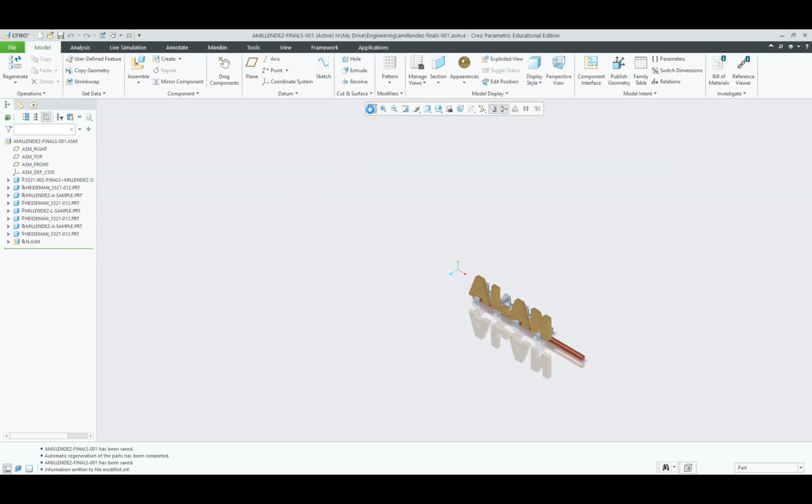This is what we are going to do for our finals. We are going to assemble our name in Creo, and we will create each of these letters as a part, and we will assemble them using the assembly feature in Creo.

So for our finals, you will have to do your name or your nickname, and you're going to need to do three unique letters. So if your name is Alan, you will have to do letter A, letter L, and letter N. If your name is Bert, you have to do letter B, letter E, letter R. Okay? You can do the fourth letter or fifth letter if you have more time, but the minimum would be three unique letters.

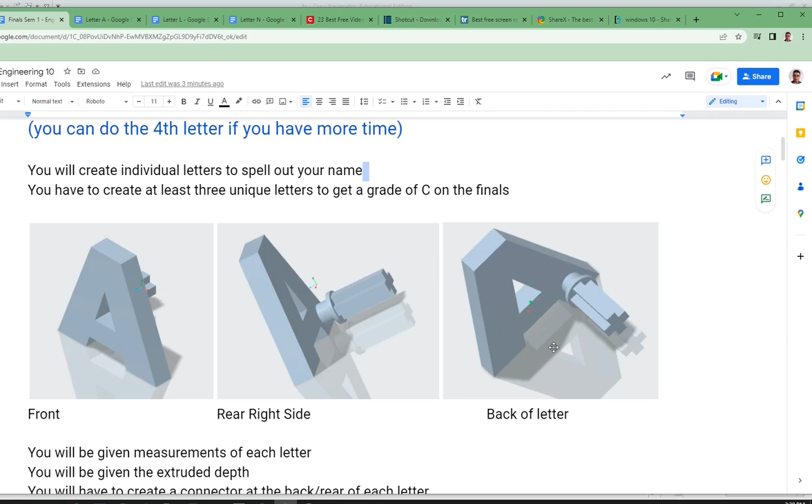So when you do your letters, you will have to do them in 3D, and you have to put a connector at the rear right side. So rear meaning back, on the right side, you must have this. So here's the back of the letter. If you look at the back of the letter, this is the right side, and that's where you're going to put the connector.

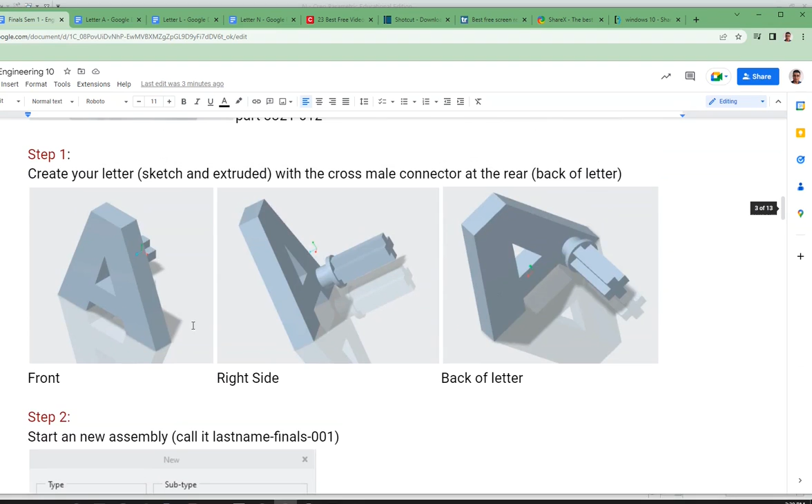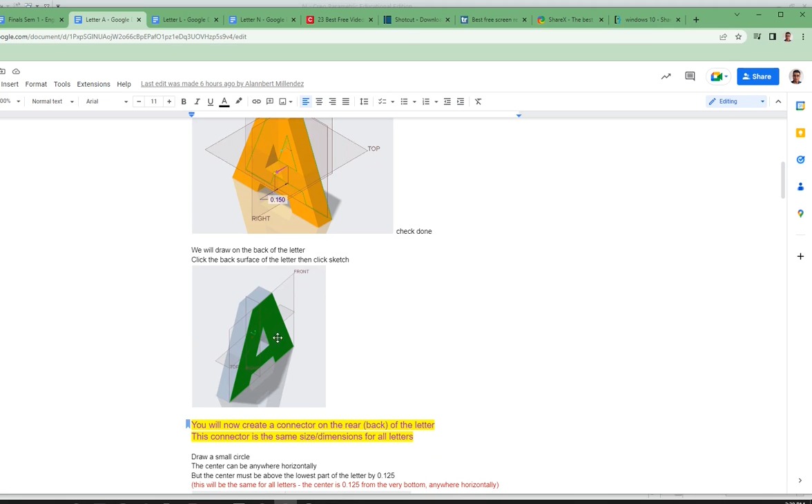Okay. So for your letter A, I gave you all the dimensions that you need to construct letter A. You will have to extrude that to 0.150. And then when you're done, you're going to use the rear side. So this is the back side of that letter. And on that back side, you're going to create a sketch, and then you're going to create a circle with a diameter, not a radius, but a diameter of 0.15. The center of that circle is 0.125 from the very bottom of the letter.

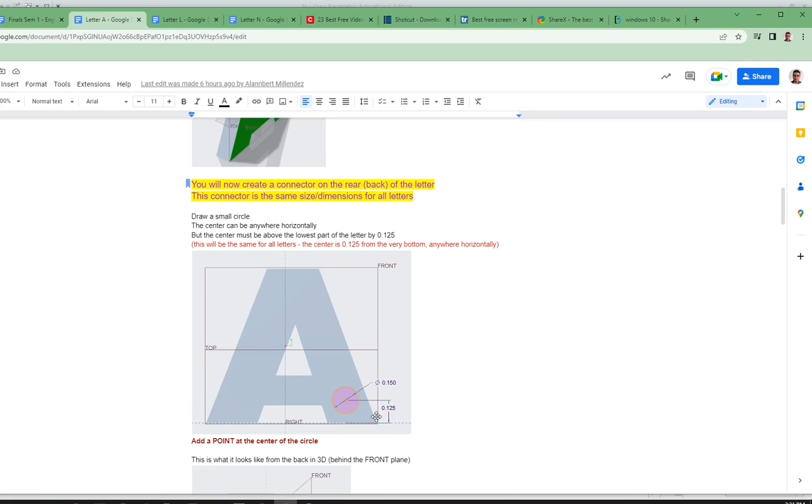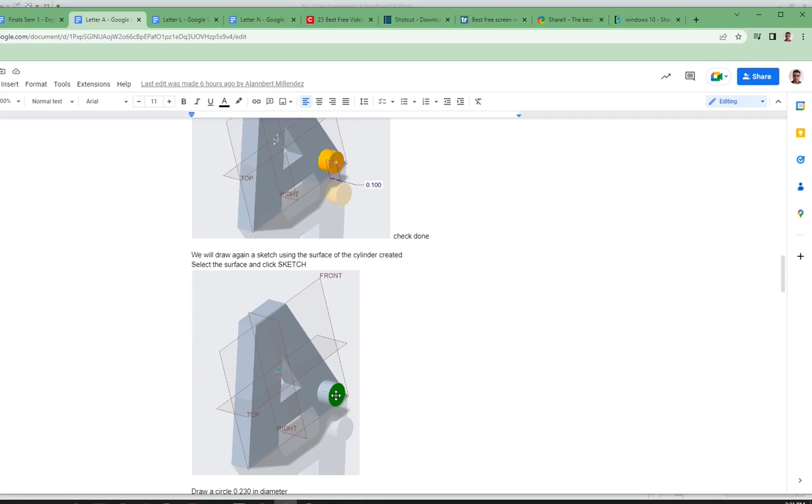At this point, you will also put a point at the center of this circle. And then once you have that circle and that point, you will extrude that to 0.10. Okay. And then you will select that face after the extrusion. You're going to select that face so that you can do another sketch, and you're going to draw another circle that's bigger. The diameter, not the radius, but the diameter is 0.230. So it's bigger than your first circle, and you should be using the same center as your first circle.

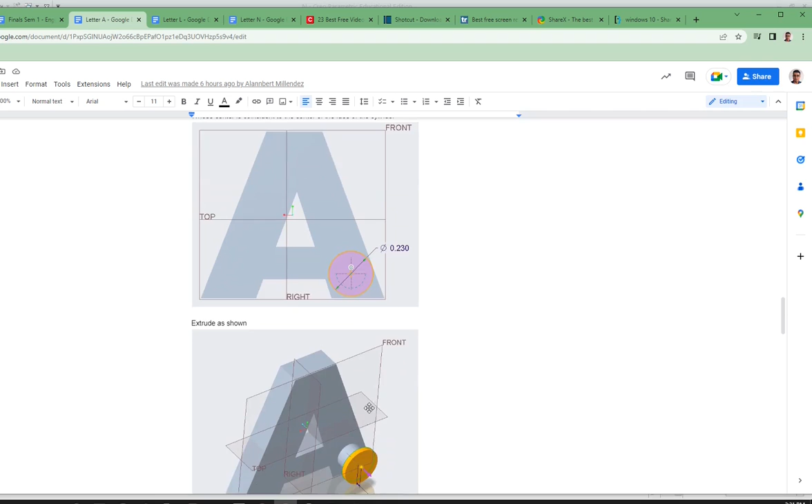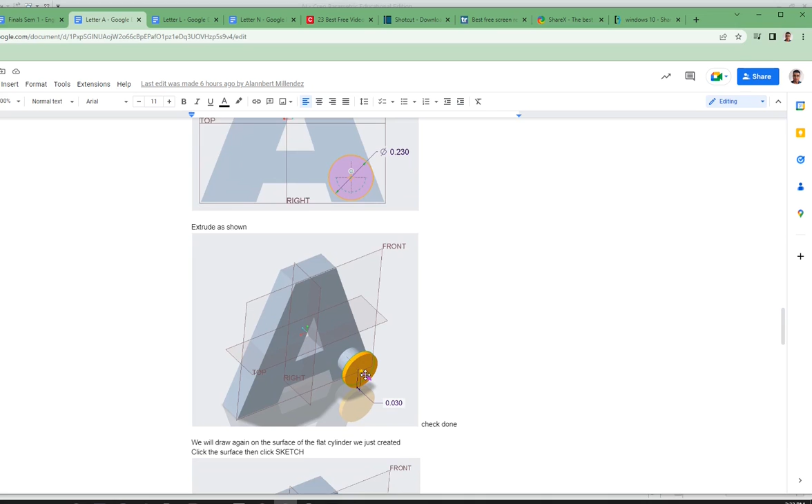Okay, so now you're going to have that second circle that's bigger, but you're only going to extrude that to 0.03. So the first smaller circle is longer, and then this one is shorter, so it's a flat cylinder. And then after you've done your extrusion, you're going to now select this new face, and then you are going to insert your cross. So the cross section that we did back when we did all our parts, you will do that again. If you don't have that, then you have to draw this cross.

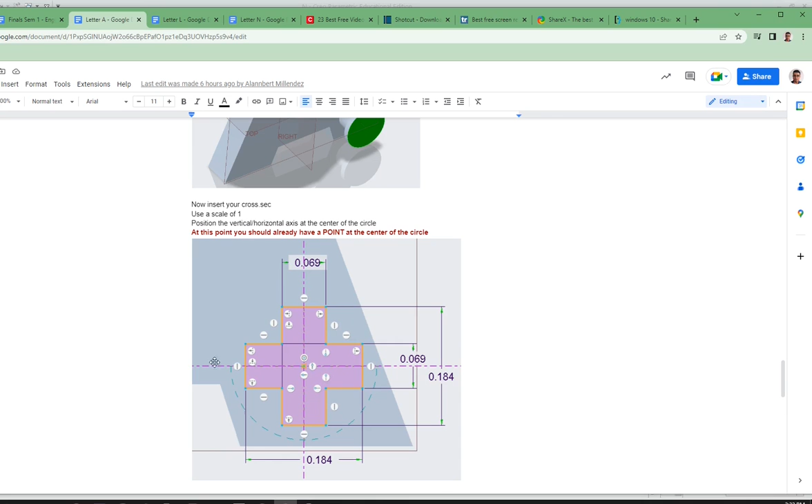Here are the dimensions. Make sure that the axis of the cross, the center of the cross, is at the center of that last circle we did. And then you're going to extrude that to 0.40, and that's what you're going to have. And then you're going to check your volume to see if you got it correct. Okay, so if the volume is correct, then you did everything correct. And then you will now go to your next letter.

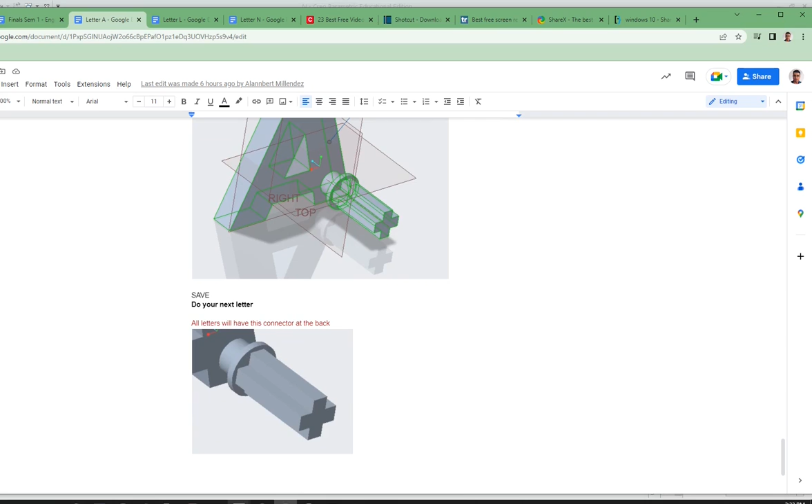Each letter will have to have this connector. Okay, so if your next letter is letter L, then you're going to have letter L also with a connector on the rear right side. Okay, there you go. If your next letter is N, then again you have your letter N, and then you will have your cross connector.

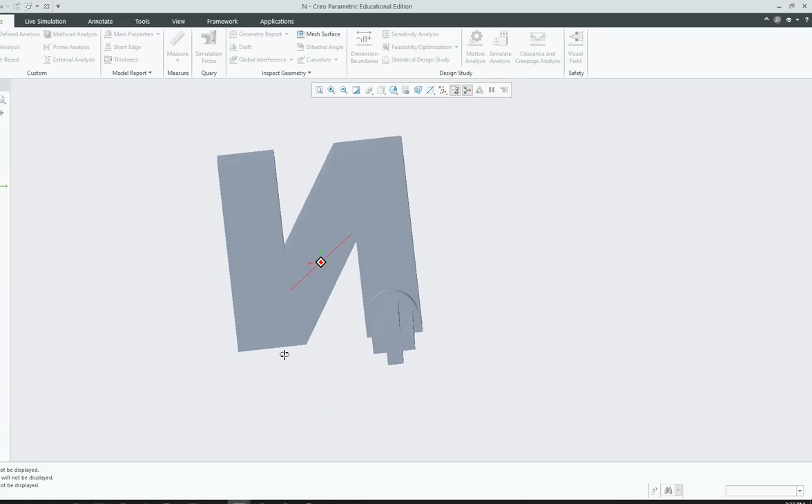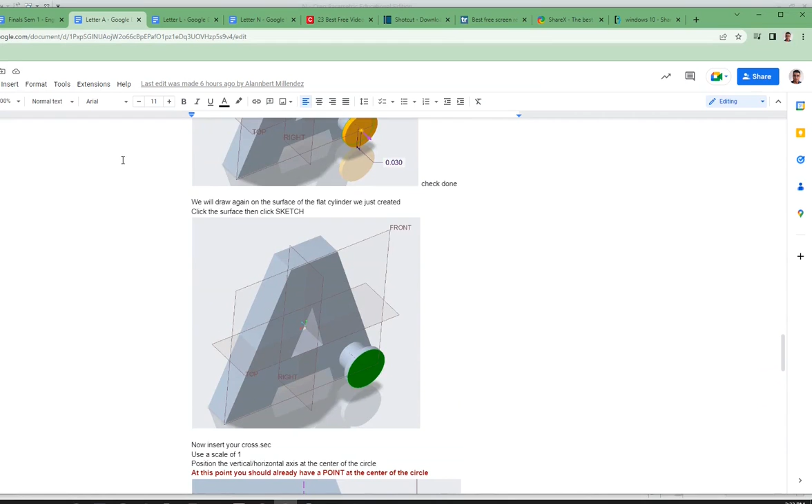Okay, so that's the first step. You're going to draw or create a 3D of each of the letters. Minimum is 3, and that's gonna give you your passing grade. And then we're going to assemble them after we're done. Okay, so I have given you the dimensions for your letter A. If your next letter is L, you also have the dimensions for letter L. You're gonna extrude that again.

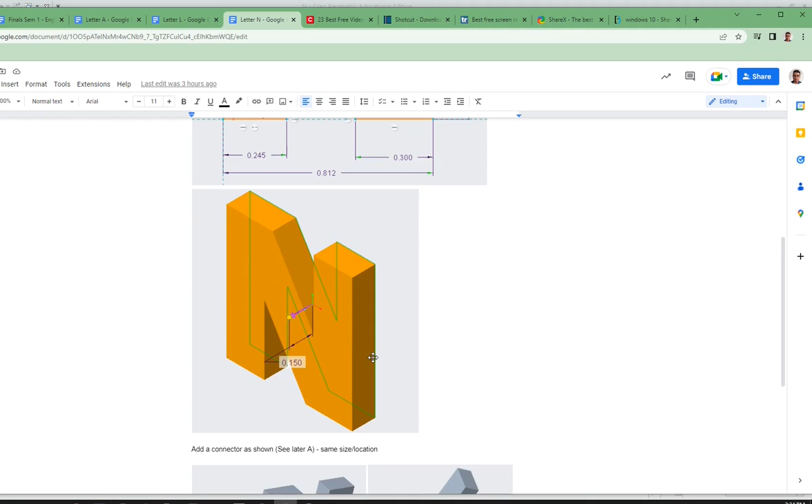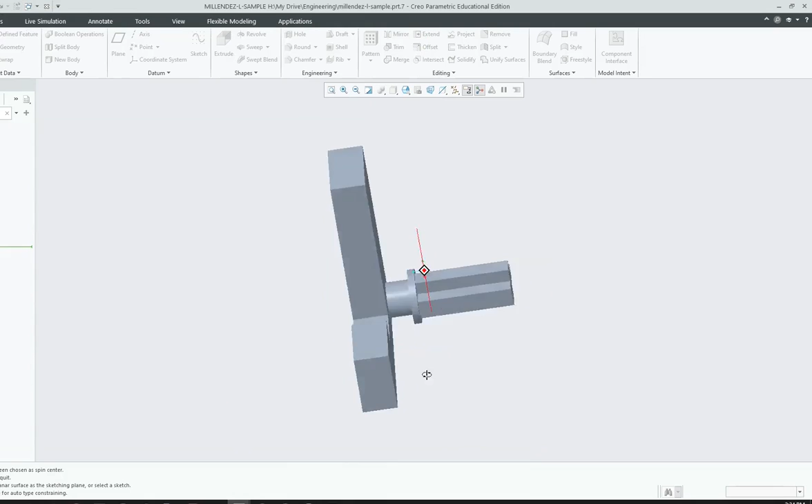And letter N, I'm gonna give you the direct dimensions for all the letters, the minimum dimensions. You can create them, and then you should always put a connector on the back rear right side of each letter. Same dimensions as you've done for letter A, exactly the same. So all of the letters will have a connector - that's for letter A, letter L, and letter N, minimum of three.

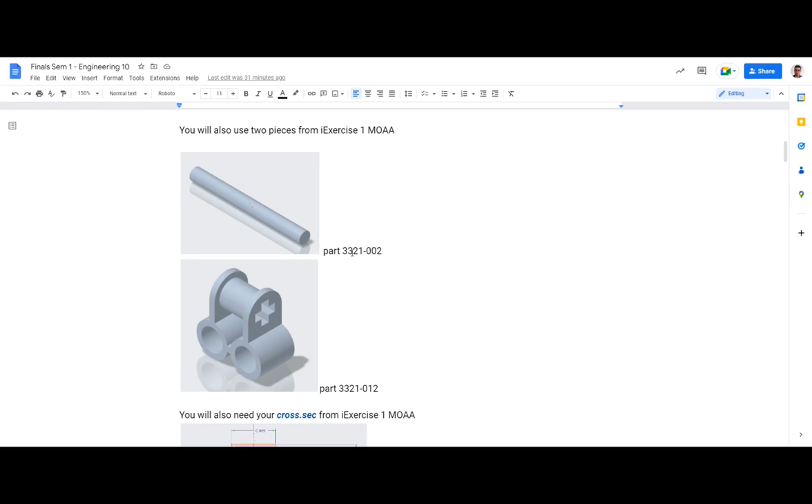The next thing you're going to do is assemble them using your two parts from the MOAA, or exercise number one. Just to follow up on that, we are going to use parts from our exercise one from the MOAA, part 3321-002 and part 3321-012. We will also use cross dot sec, which is one of the first sections we did from one of the very first parts in exercise one.

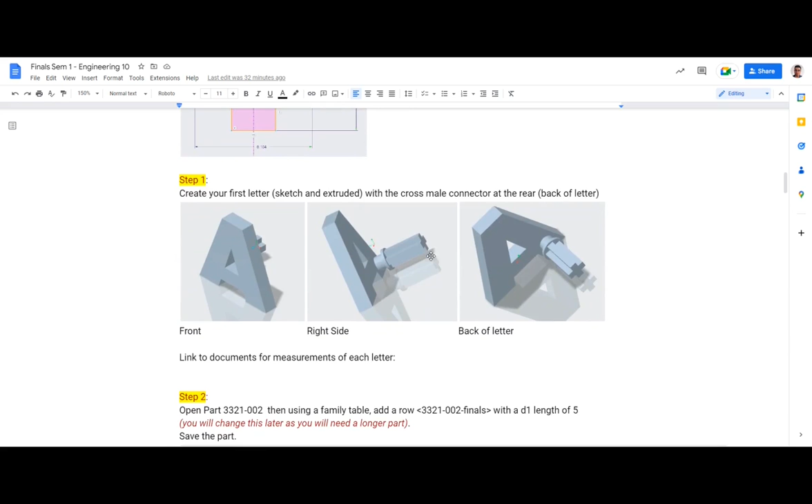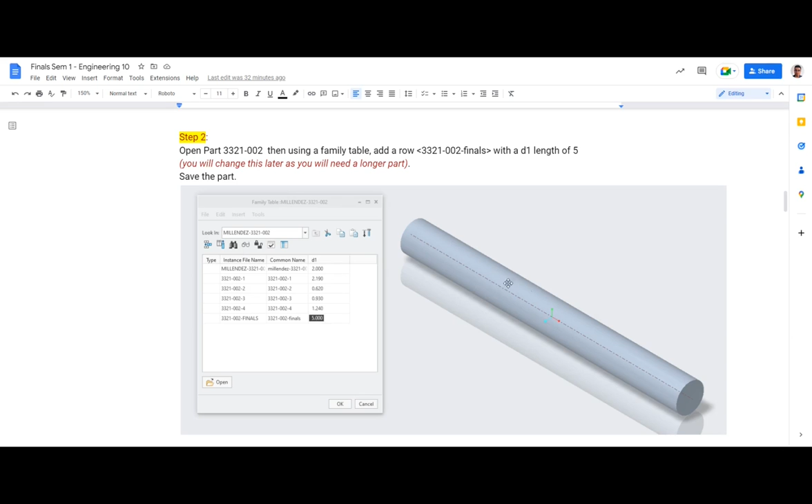So again, you're going to create your letters, put a connector, and then open up part 002, and create a new row using family tables. Assign that row a distance of 5, and you will go back to this one because 5 may not be enough for your name. So you're going to create a new assembly, make sure it says assembly, and name it using your last name dash finals dash 001.

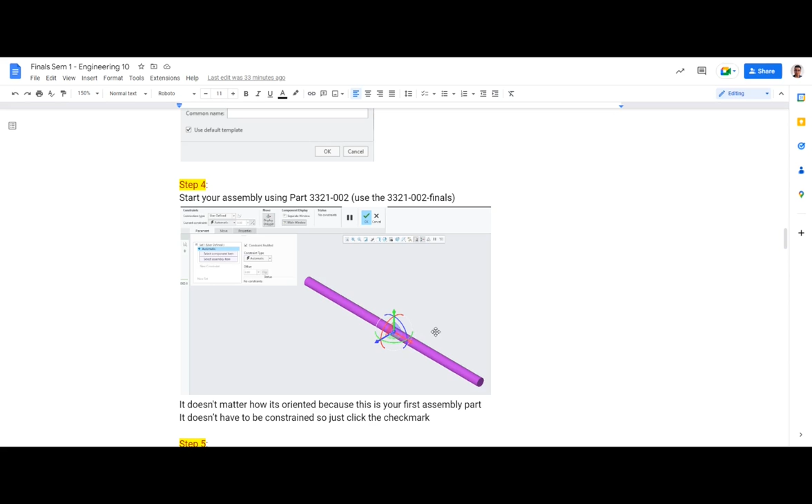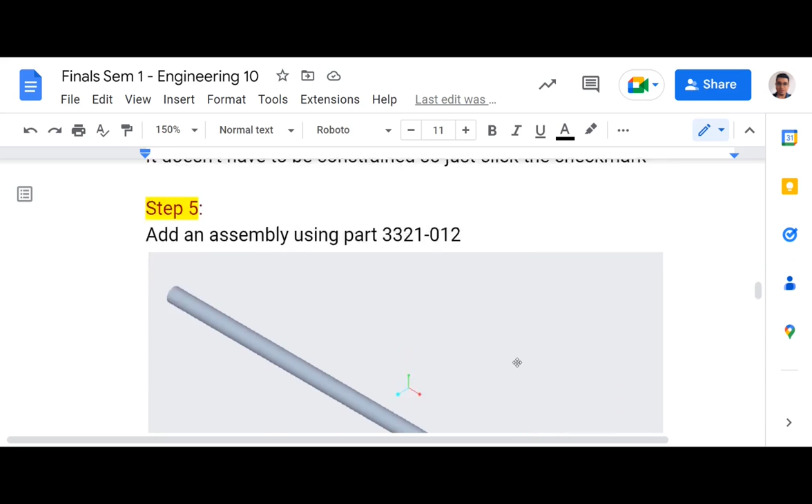The first part you're going to add is part 002, using that new family table row that we created. It doesn't matter where you orient that, because that's our first part. So all you do is click the check mark, and then add a new assembly - you're going to add your 012. So 012 would be your connector from what we did on the MOA, or the assembly - that's 012. After that, you will align that to the left end of the 002 part, the rod.

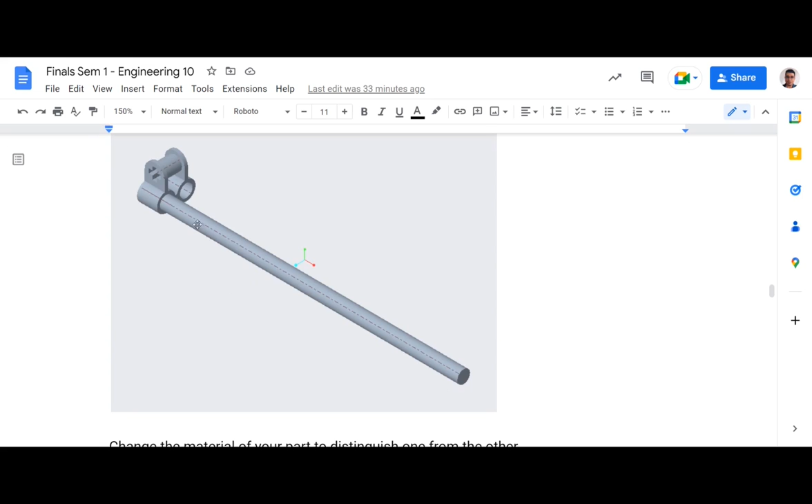And then you can actually change the color of this material by going through the appearance and then selecting a color from this list. Okay, let me show you how.

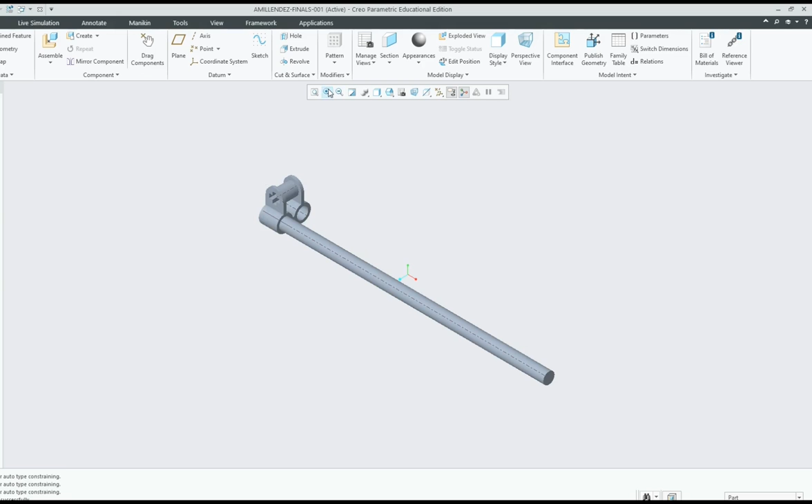Now you can see that the parts are aligned. So if you zoom closer to this area and turn that around, you can see that part 02 and part 12 are aligned.

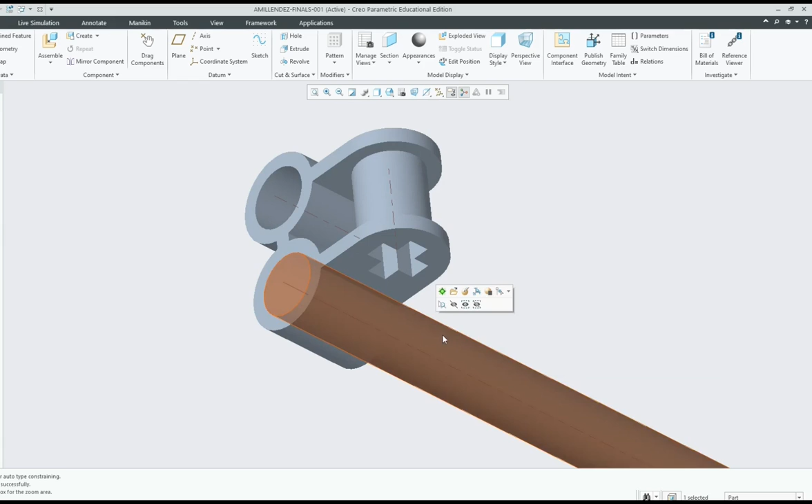Also, you can change the appearance of the parts by putting colors on them. To do that, you change your selection to part, select, let's say, the rod or part 002, and then over here up on the ribbon, there's appearance, and you can select your own colors here.

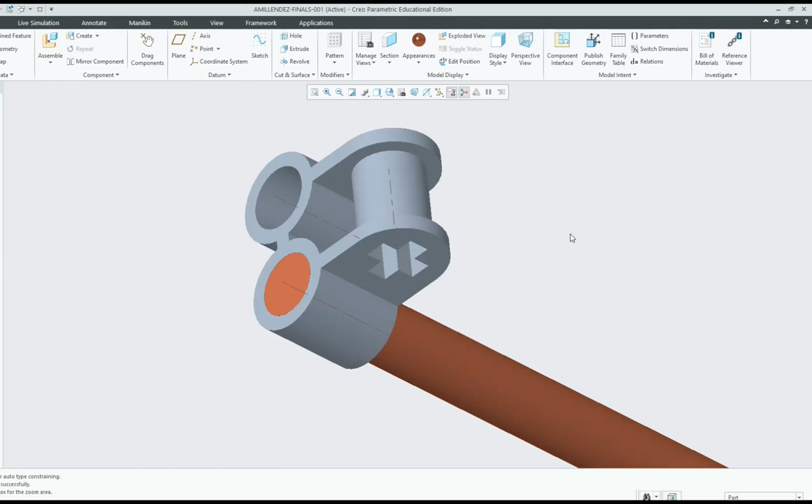For example, let's select this one, and then it would now change color. You can see the difference, that they're aligned - it's flush in the face and everything. You can also change your view from standard shading to shading with reflections, and it should just give you a more realistic effect of your part.

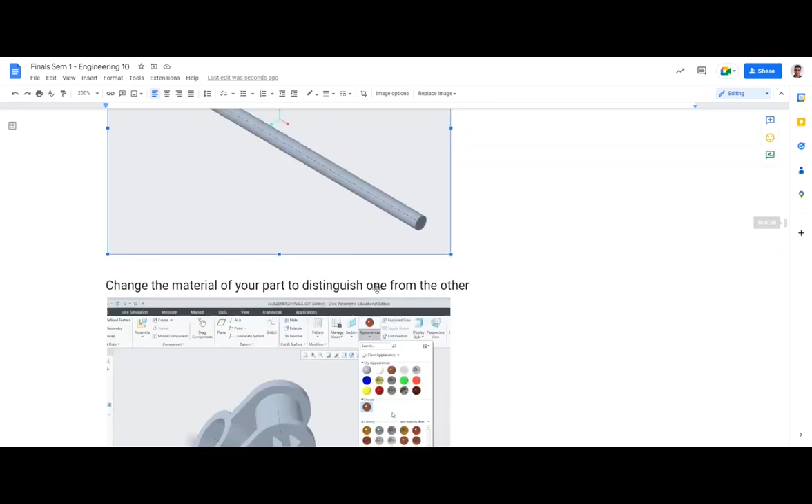Once you have changed the appearance, go ahead and click save, and you're now ready to go to the next step, which is adding your first letter. In my case, this was the letter A, and remember that letter A and all letters have a correct volume depending on the letter, and it has these connectors found on the right rear of each letter.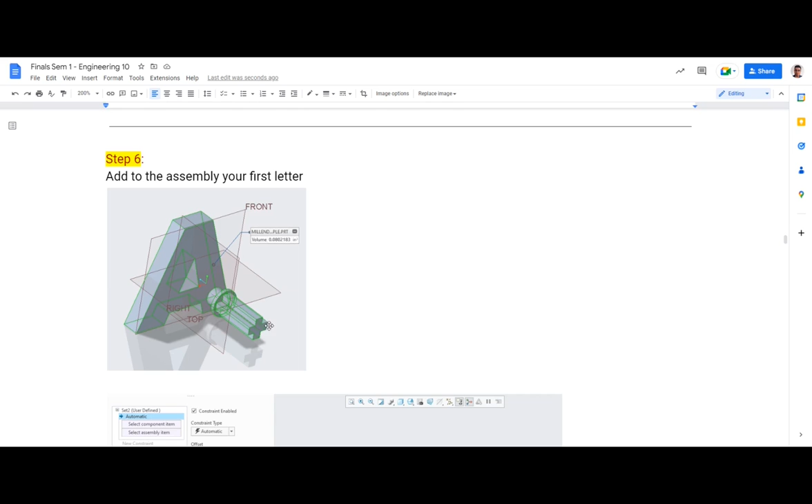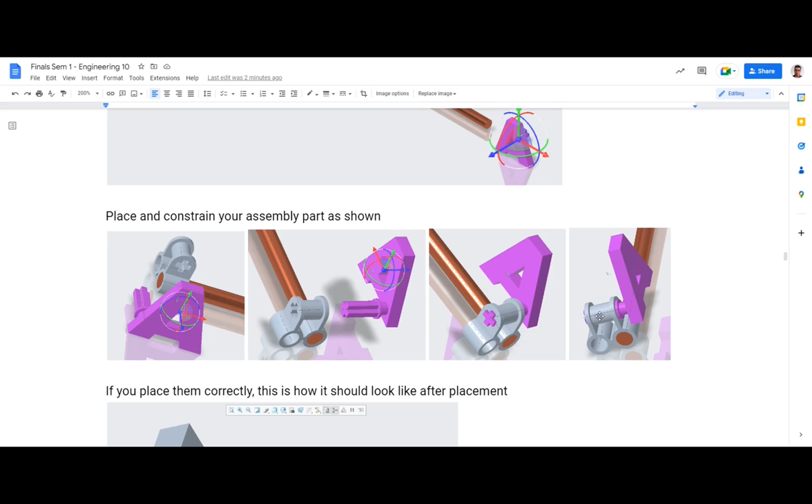When you place it in Creo, you have to place it and put constraints so that the connector will align to the cross hole of part 321.012. This is actually the essence of the finals, is to do your assembly - connect it and then make sure that it inserts correctly. There will be an extra piece sticking out, and the 321.012 gray piece and the letter should be flushed on this surface.

And when you place them correctly, when you check the green check mark, this is how it should look like. You can change the appearance again, just like I showed you before. And the last thing you should be doing is checking for a global interference check.

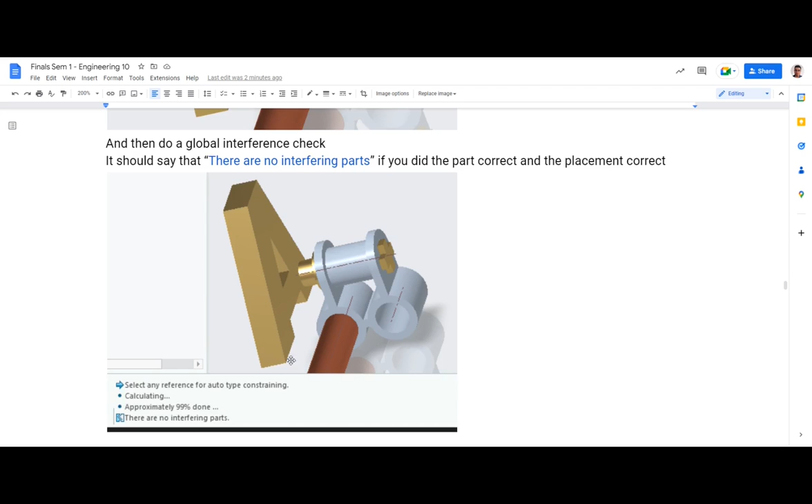It should say in the lower left corner that there are no global interference or interfering parts. Once you confirm that, you can click save, and this is how it should look.

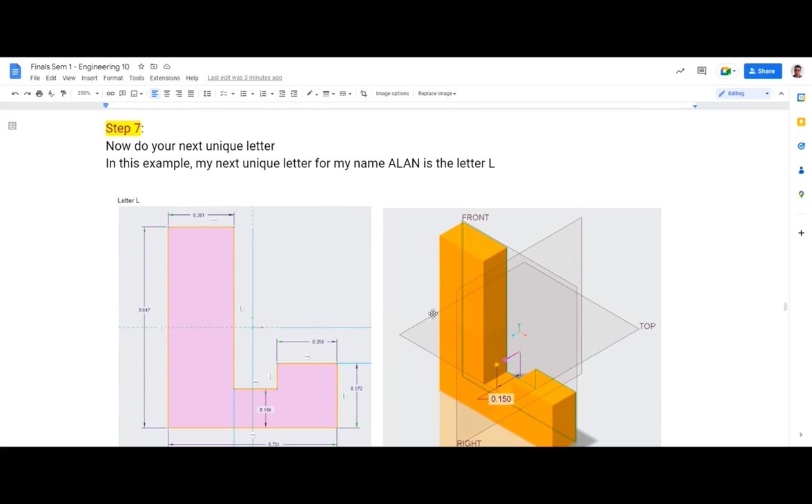The next step is to create your next letter. In my case, it's letter L. I'll give you all the measurements for each letter. You'll extrude that letter again, and from the right rear of each letter you'll create the connector, just like you did for letter A.

Now, on this connector there's a circle, and the center of that circle is always going to be 0.125 from the very bottom of each letter. That's always the case.

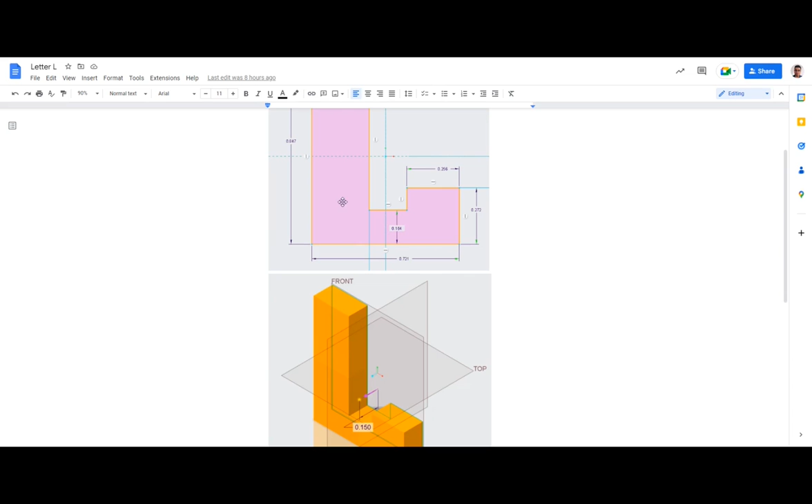It doesn't really matter where the circle is on the left and right, but the circle on the rear face—not the front face, the rear—should be 0.125 from the very bottom of each letter.

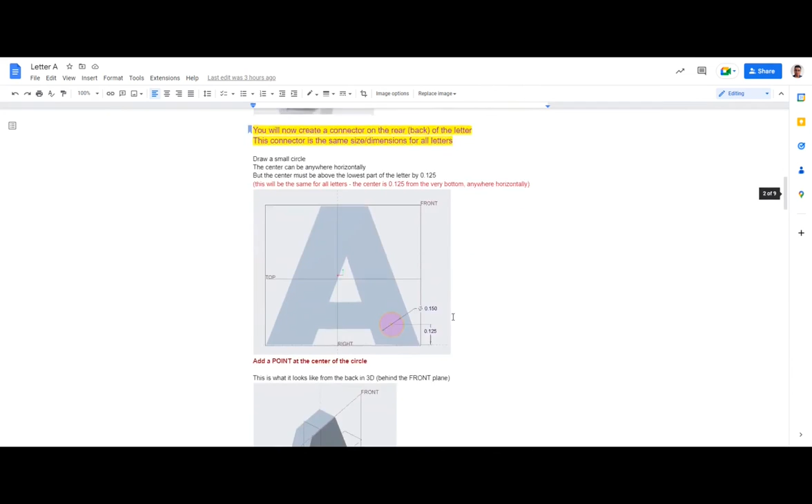I showed you how to do that on letter A. You have to draw a circle on the right rear side, then put a point. You can see the circle and the point are 0.125 from the very bottom of the letter, and then you'll extrude that again to 1.0.

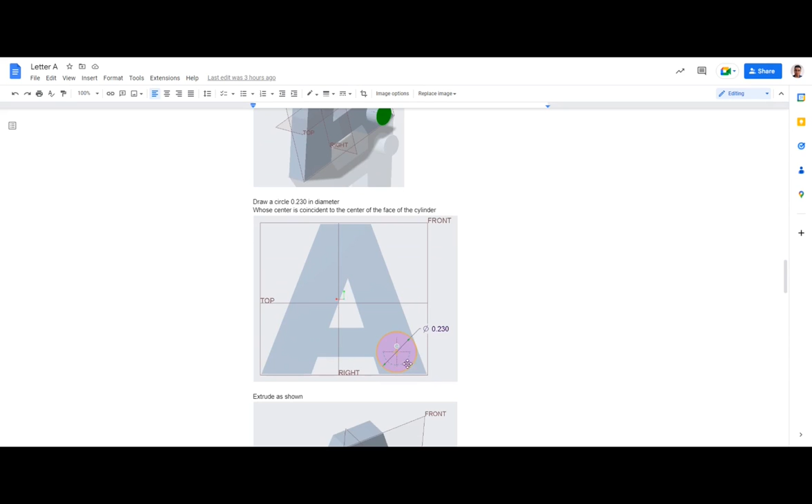Then you're going to create a new sketch using the surface of that extruded cylinder. You'll create a new circle with a diameter of 0.230—diameter, not radius—and they must be concentric, using the same center.

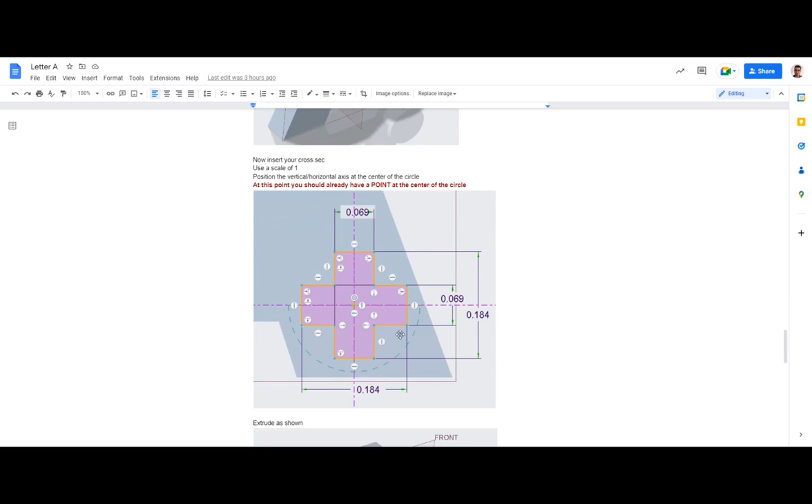Then you're going to extrude that to 0.03, and then create your last sketch using that surface. Import your cross section or draw it again if you don't have one, extrude that to 0.40, and when you click OK, you can check the volume.

That's how each letter should be, so now you're done with your letter L.

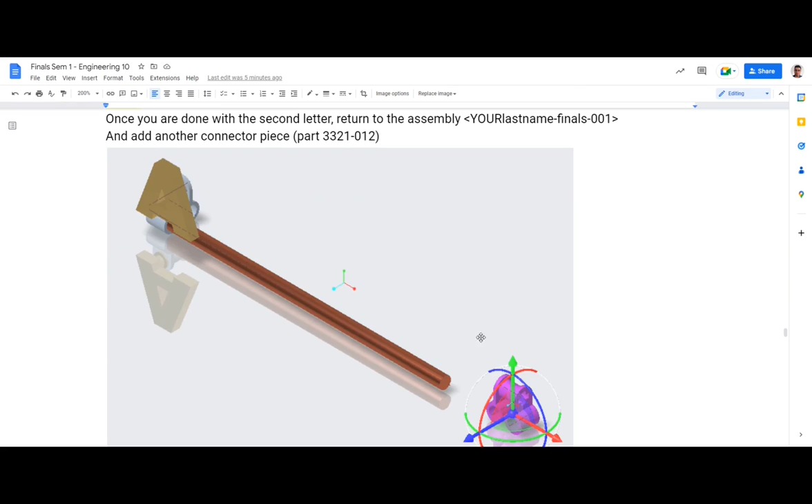When you're done, go back to the assembly and place not the letter first, but another part, 3321012, which is this connector, and do some placement and constraint. For now, you can just put it anywhere in the middle of this rod, which is 3321002. Once you have it there, the next step is to add your letter.

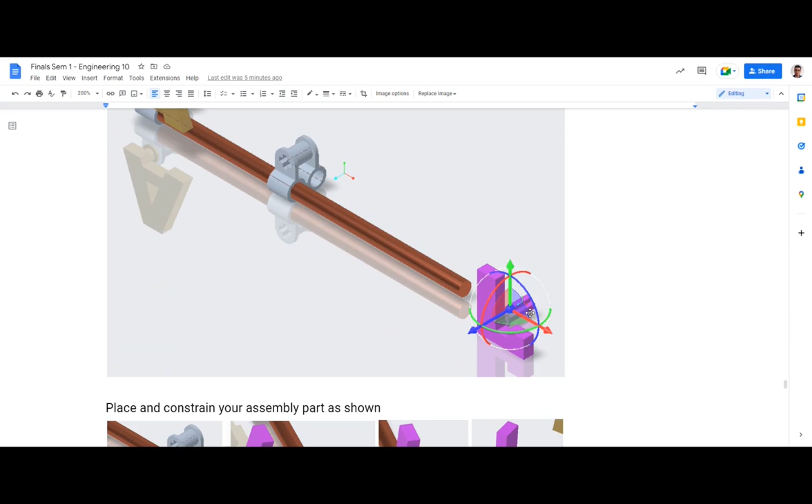Remember, there's a connector here, and then you'll put this letter and use the back connector to fit it into this hole. You can see here, you can move it, and do some constraints so they're aligned, then have it flush on the surface with something sticking out in the very back end.

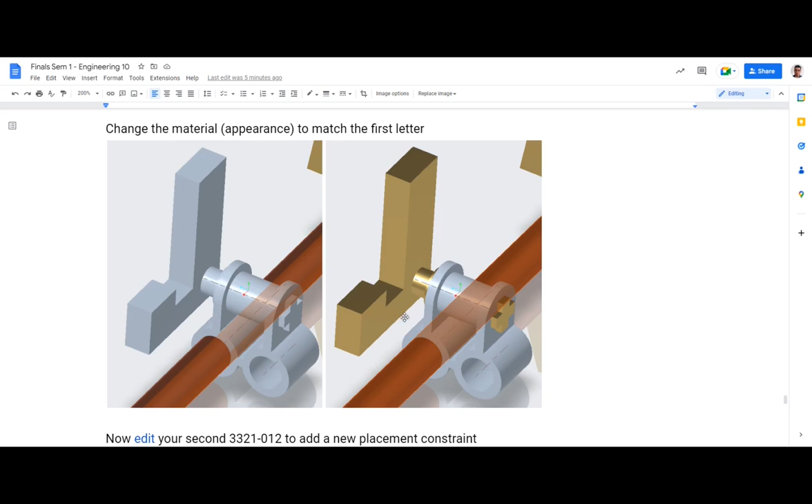When you're done, you can change the appearance again, just like we did for letter A. Now, because we placed this connector in the middle of part 002—this brown rod that I have here—

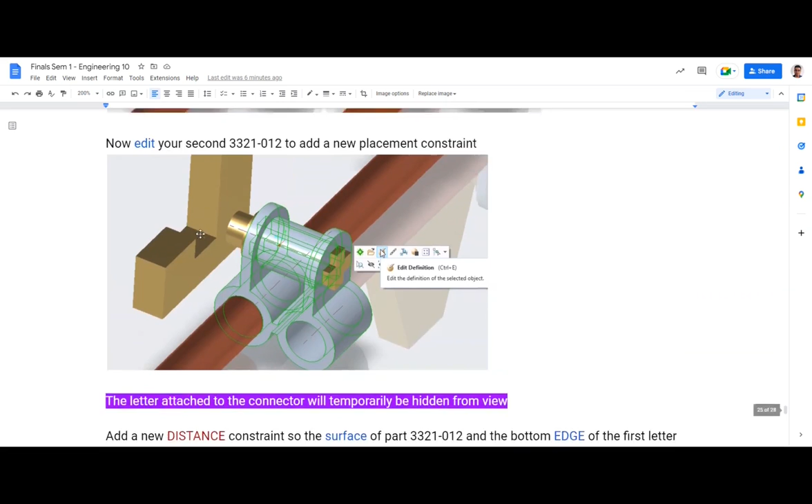you'll have to edit the definition of 012, and this letter L, or your second letter, will disappear temporarily. As you put in a new constraint, you want to use the inner surface of 012 and the edge of the first letter, in my case letter A, so that they have an exact distance of 2.0.

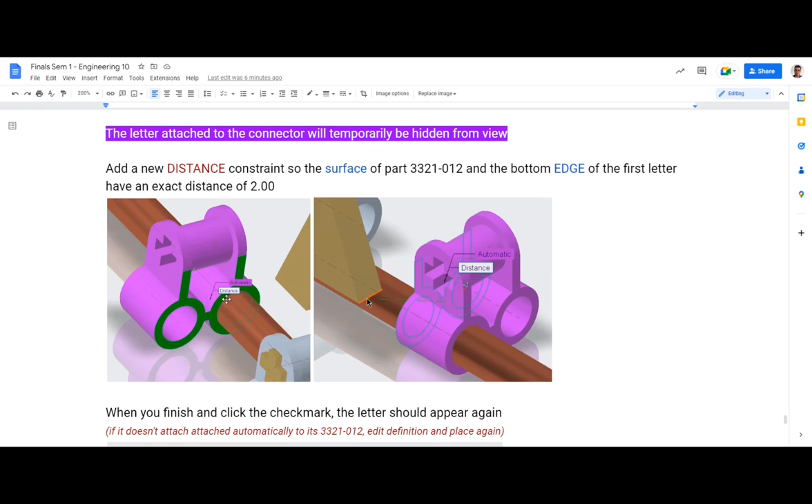You want the distance between this surface and that one to be 2.0. Let me highlight that—you want that to be 2.0. Once you have that, when you click the check mark, the letter should come back and attach to this connector. If it doesn't, you can just edit the placement again.

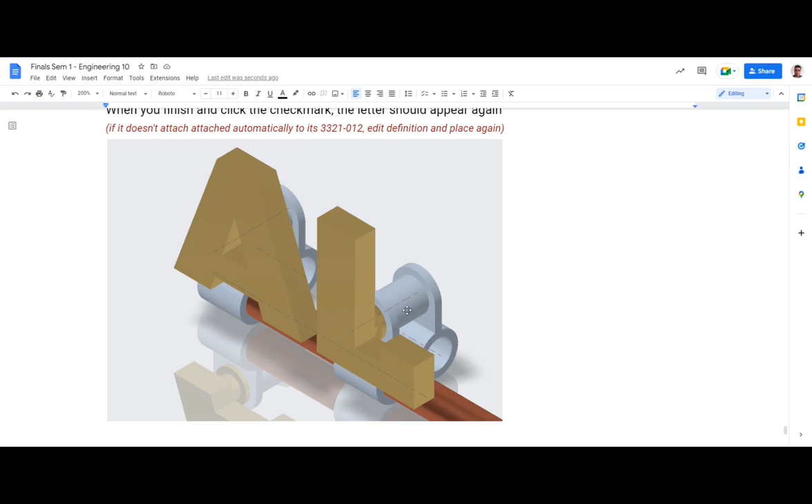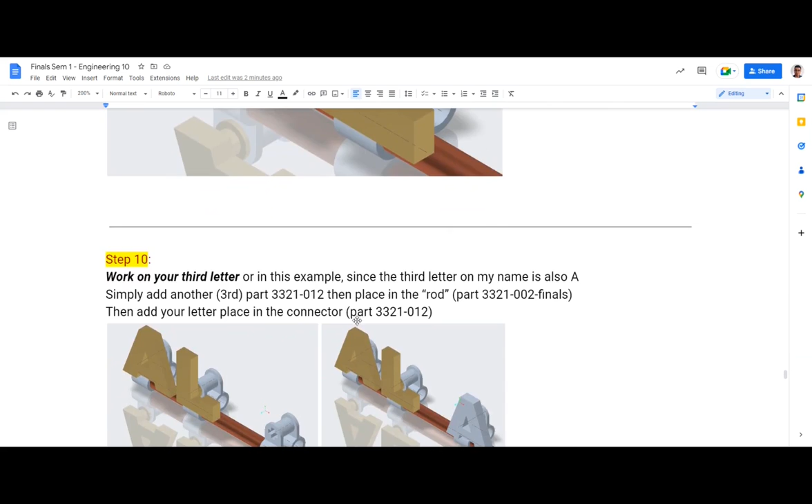Now you're ready to put in your next letter. In my case, since my next letter is the same as my first letter, A, I don't need to create it—I just place it again. So we just finished putting in our first two letters. I'm now going to work on my third letter, but since it's the same as my first letter, A, I'll simply do the same things I did before.

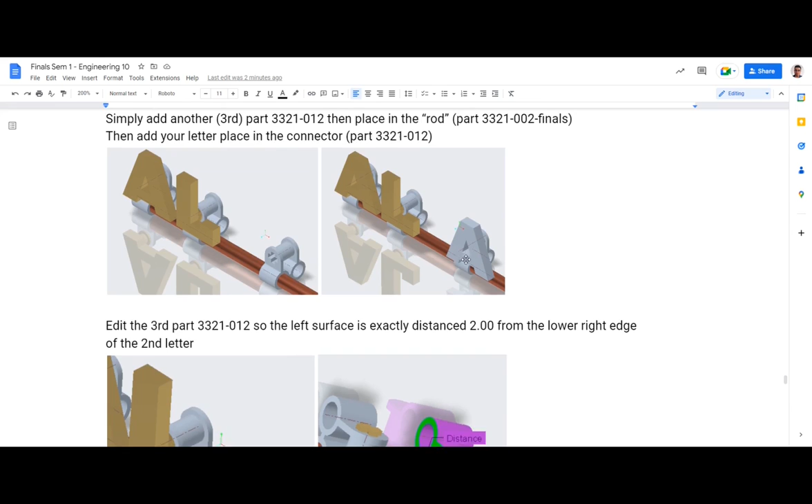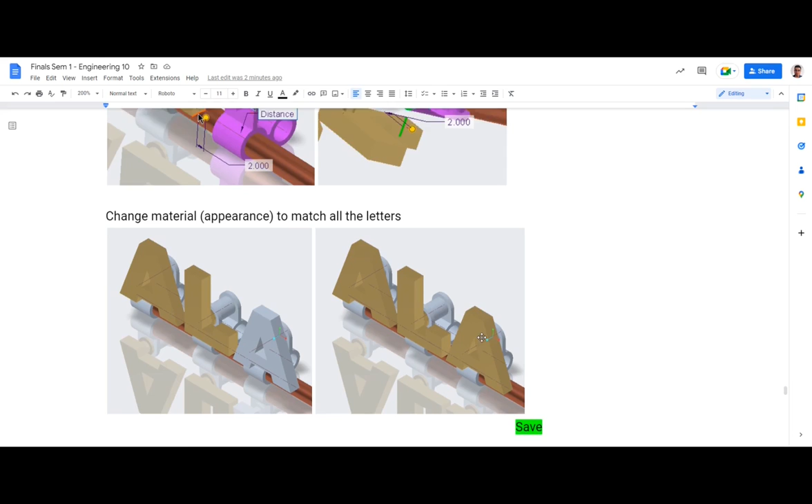I'm going to insert part 0012 and put that on part 002, then I can put in my same letter by adding it to the assembly. Once I put it in there, I can edit this part and put a distance constraint on it so that when I press OK, the letter A will be spaced closer to the distance between my first letter A and the letter L here. Then I'm going to simply change the material appearance.

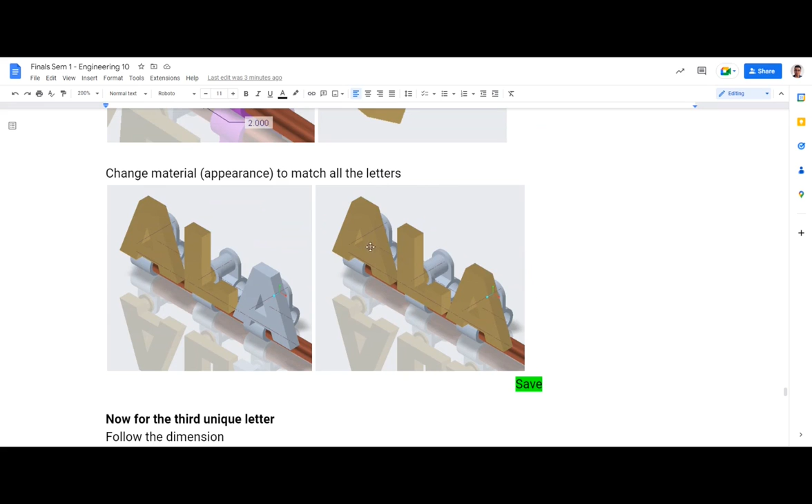But if you have a third letter, like a unique letter, such as letter N - letter A is a unique letter, L is a unique letter. This is not a unique letter, they're the same as the first one. So you are required to have three unique letters: A, L, and then this is my third letter.

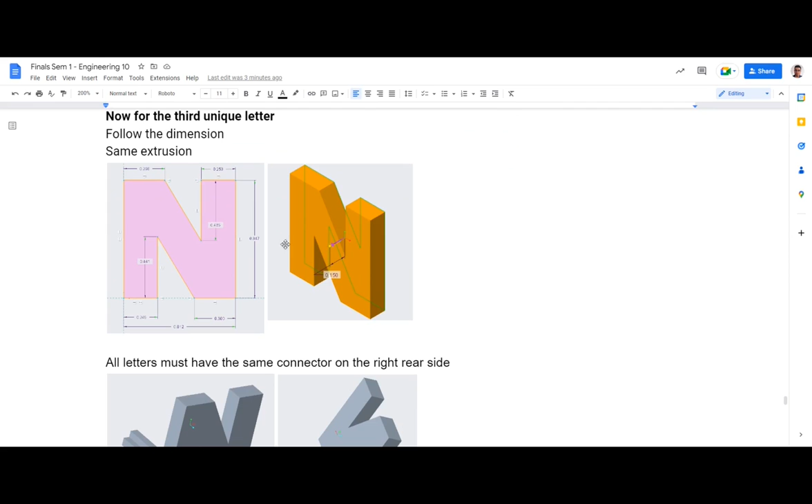I will give you all the measurements of the letters. You will extrude it to the same thickness, 0.15. You will put in the same connector on the same location. Remember, the center of this connector is 0.0125 from the very edge of each letter. Once you have that, you're now ready to do the same steps.

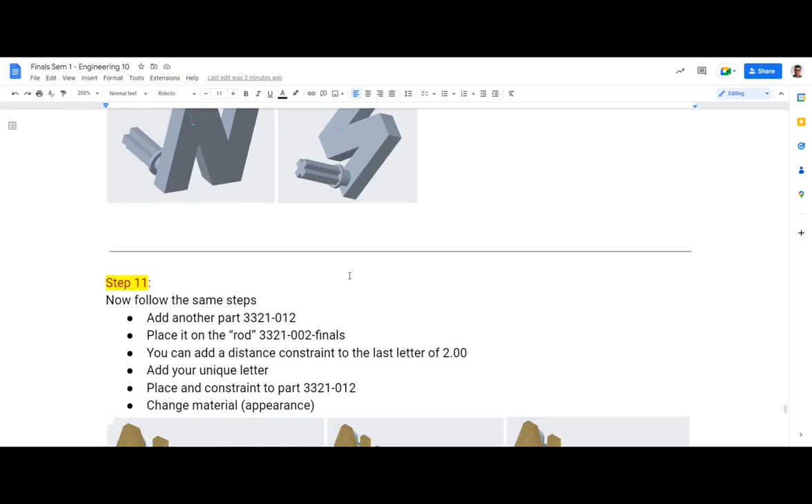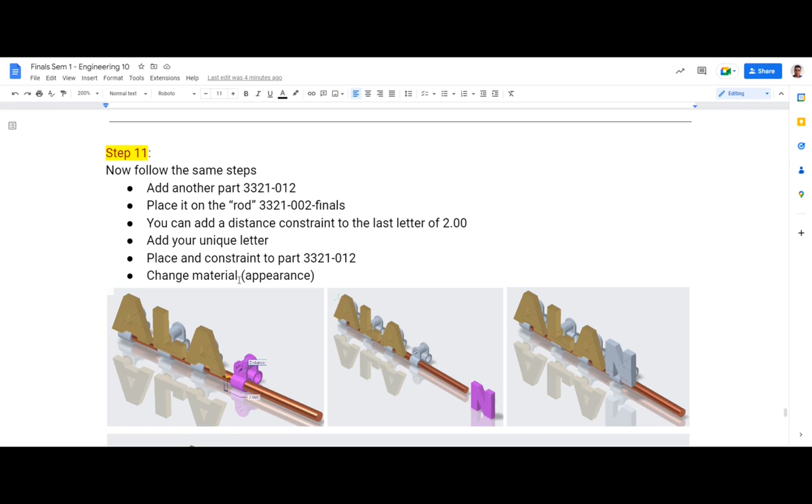You're going to add another 012, put it in the rod, and then at this point you can actually put a distance constraint before you even put the letter, or you can do it after you put the letter. It doesn't really matter. So add your unique letter, then place a constraint on it, and once you put it in there, you can see that they're almost equally spaced.

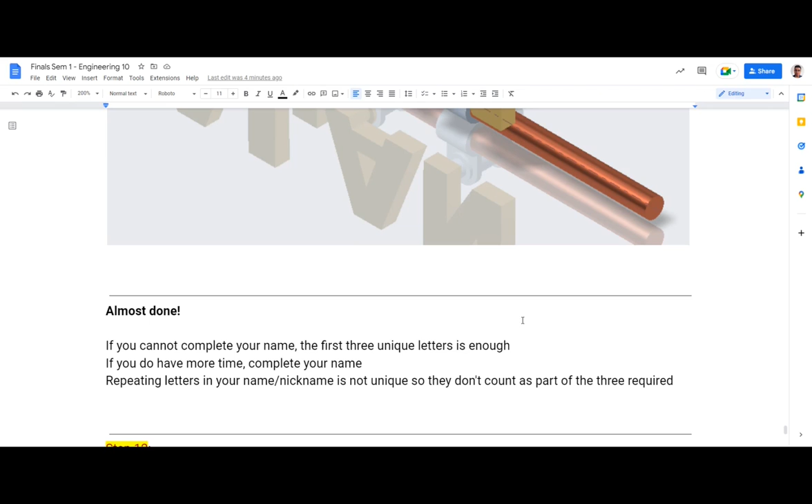Then all you do is change the appearance on it so they're all the same, and you are almost done with your work. If you have more time, complete your name. But if you don't have time, the minimum is three unique letters. But if you have time, like some of you finish really early, then try to complete your letters.

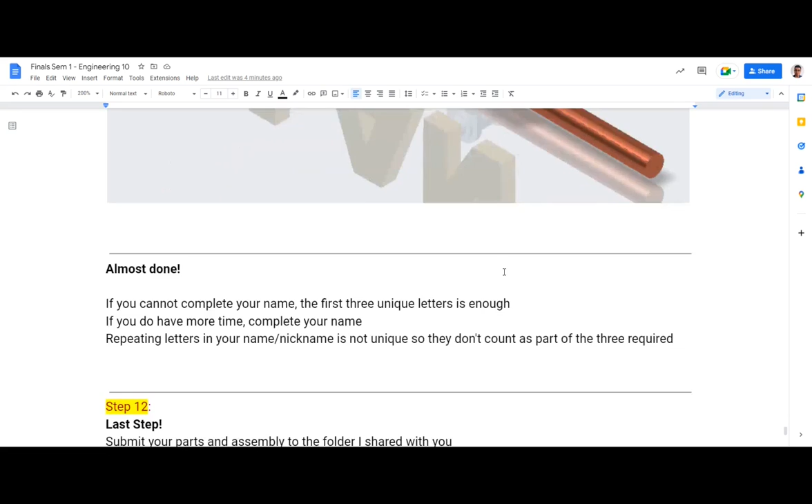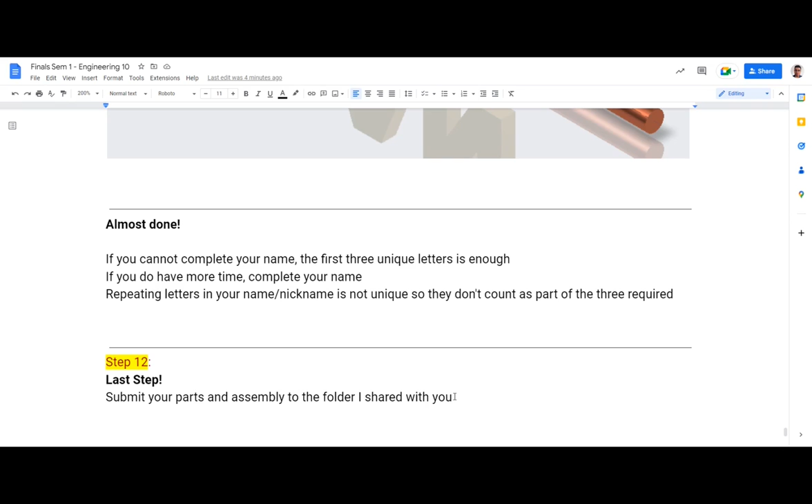The last part that you're going to do is submit your part and your assembly to the folder I shared with you. So I did share with you some folder, and I'll try to show you how to do that on this video.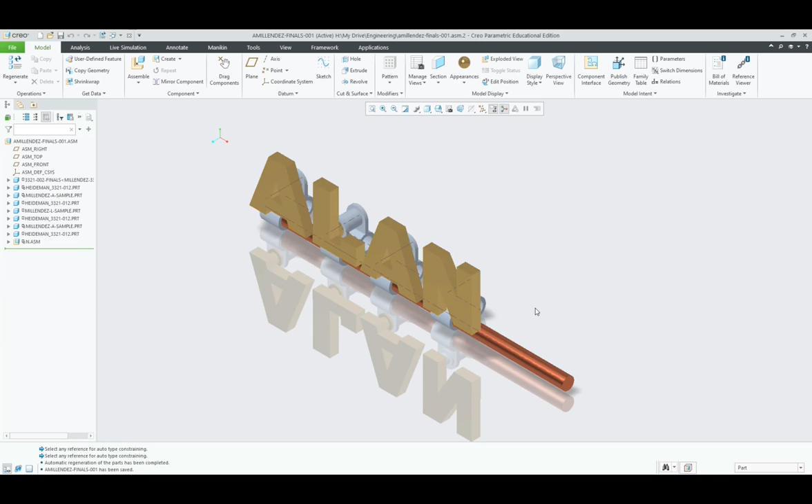Okay, so now that you're done and you have all the letters of your name on your assembly, you must have three unique letters on it. So I have letter A, I have L, and then I have N. This second letter A is not unique because it's the same as this one. So you must have three unique letters. Once you've done that, you can see it's all connected.

And it's okay if part 002 is longer, that's fine. You can change the length of that one on the family table. But once you're done with that one, go ahead and click save. It might ask you to regenerate first, so click regenerate before you click save. So click regenerate, then click save.

And then you will see that all the files that you inserted are going to be on your model tree. So this is the assembly. This is the long brown rod there, part 002. Then I have my letter A, letter L. I have my letter N here.

I have part 012. So how many parts did I use, or how many pieces of files do I have? I have 1, 2, 3, 4, 5, and then 6 - this whole assembly is 6. So I have 6 pieces to submit.

You might have more than 6 if you have a longer name and you have more time. And if you didn't finish, you might only have one letter, then so be it - that's what you have. So once you're finished, go ahead and regenerate and save.

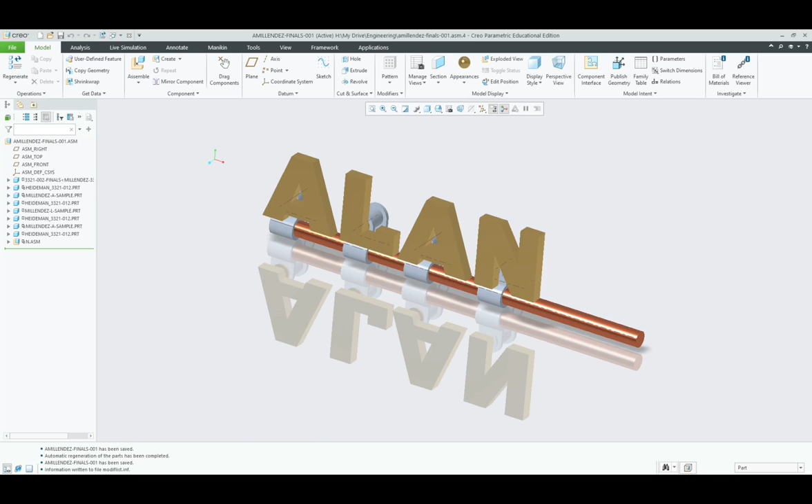files. Now, if you missed any one of these, it will turn red and I won't be able to see it. So make sure that you know that you have at least 6 files to submit. If you have 3 unique letters, 1, 2, 3 for 3 unique letters. Then I have my connector, that's 4, that's 5, and this whole assembly, that's the 6 files you're supposed to submit.

Okay, now if you're not sure which one, I told you that you can submit multiple copies of those files. The more files you submit, the longer it will take you to upload them, and do not leave the class until all of these are checked green. Okay, so you are now done with the finals. That's how it's done. And I'll put a video on how to do this again over here in the bottom of your finals. Okay.